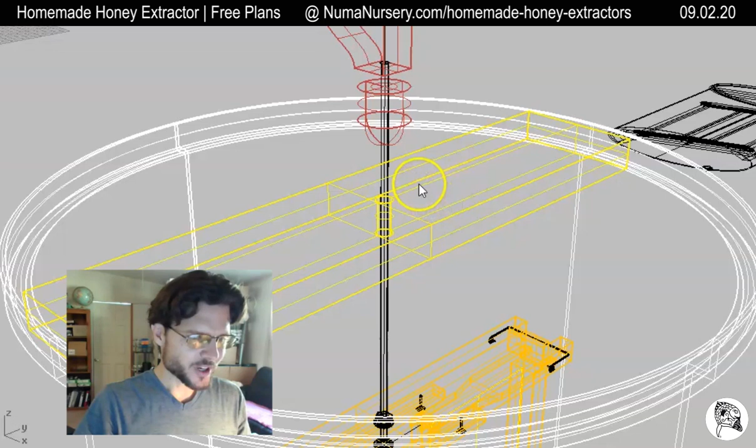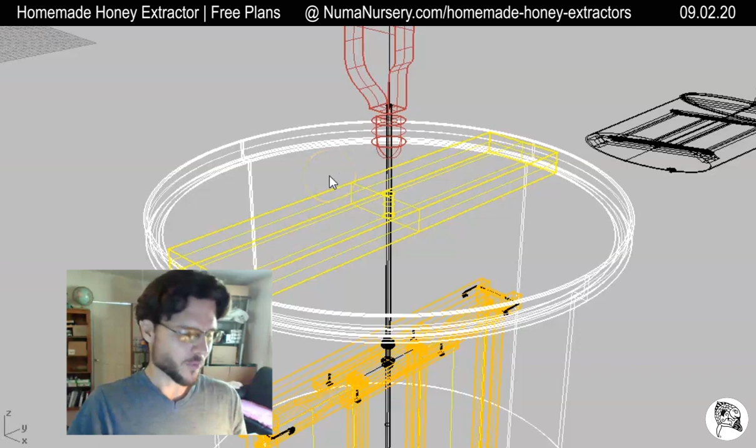In conjunction with this video, we wanted to come out with the free 3D plans for the homemade honey extractor.

So the past couple of days, I've just been putting in the honey extractor plans. I have it right here. This is kind of what's left over of the honey extractor after using it tons of times.

Now a couple years later, here it is. Still, you can see the bottom piece brace, the top brace, and how these metal wires right here actually hold the frames in place at the bottom. And so that way when it spins on a drill with this thread, which is tightened on the bottom brace and the top brace with hexagon nuts, they can spin and extract the honey from the frames.

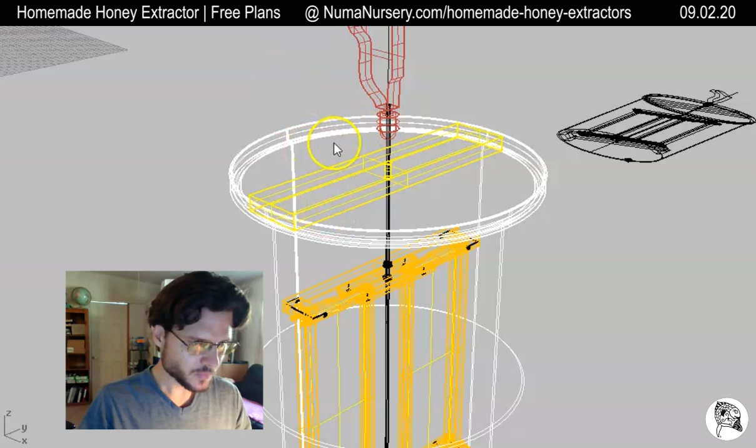Okay, so we have a 3D model here. We can change it—I'm just getting back into Rhino, it's been a few years—but we can change this into a ghosted view. Just take a second. There we go. That way you can see exactly what we're working with here.

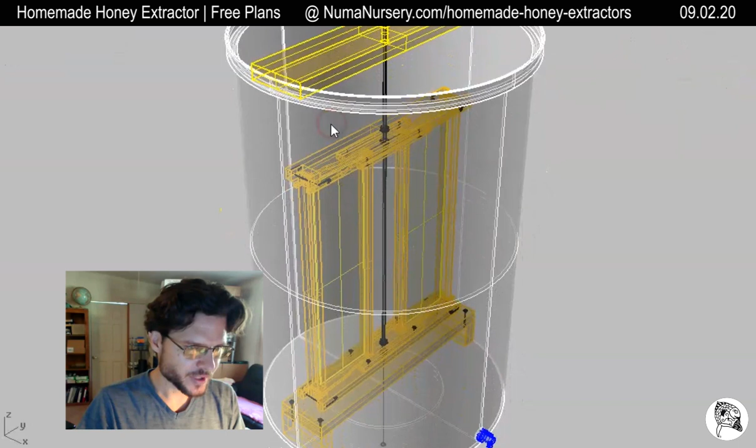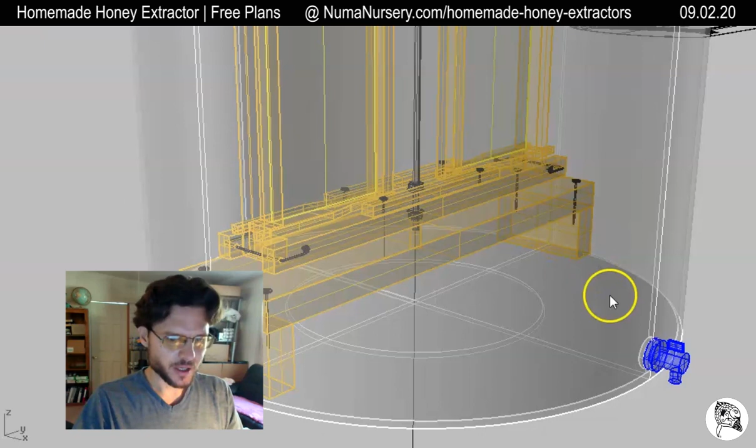We went ahead and put this model in Rhino. It's a 3D model of the extractor. You can see the drill at the top. It's got a sway bar, and it has a little platform at the bottom here that the homemade honey extractor actually sits on.

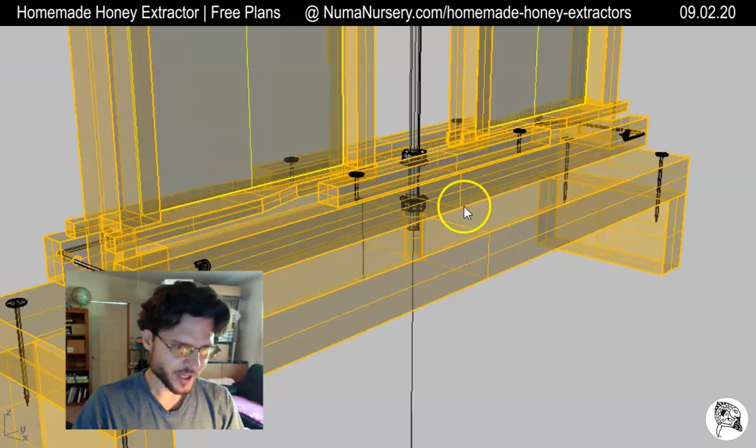There's a hole here, and I can turn off some of these layers. Let's see if I can turn off wood barrel. Let's see if I can turn off barrel. I'm wondering if this is the right one. Yep, so we're creating layers here, and I can select this nut, hopefully.

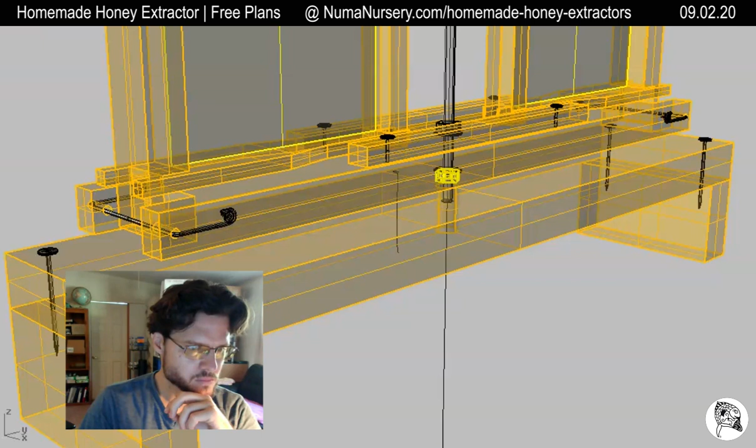Oh, there it is. All right, and so we'll select that nut there. And let's see if we can rotate around that. Just takes a second. There we are.

Wonderful. So we have a washer, and we have a nut, and there's a hole in the platform that this will just kind of sit and rest in as it's spinning.

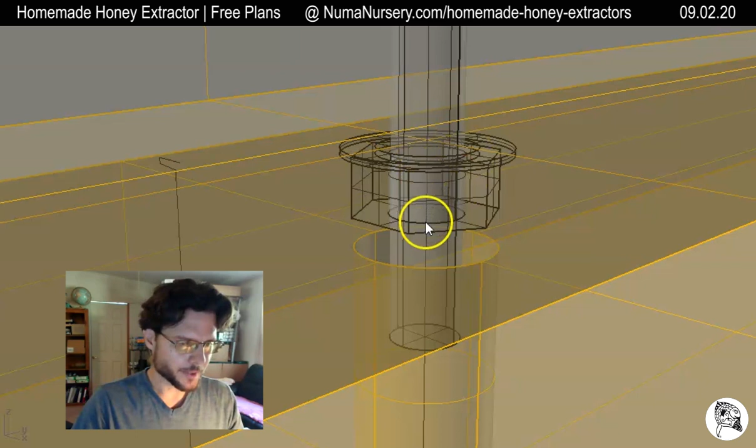I mean, you could probably put another washer here, or sometimes a bigger screw, as it sits on top and spins. Kind of have to experiment, maybe make this hole a little bit bigger so that this whole thing can slide down into the hole.

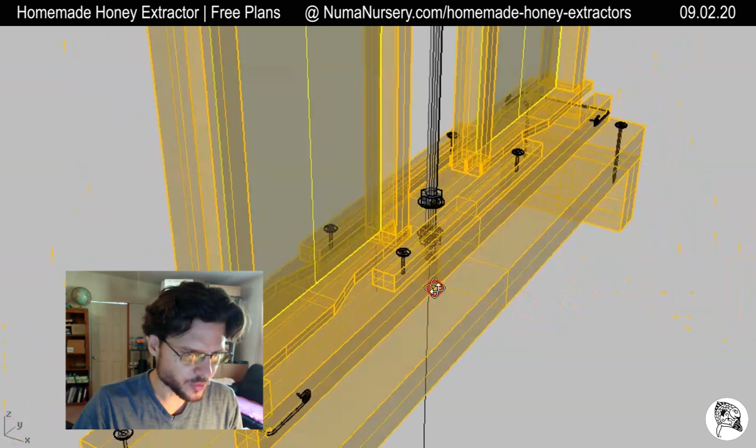It's just a prototype of a homemade honey extractor. I'm trying to keep it quick. We've got a piece of wood and some nuts that hold it in place. There are two braces here, two brackets on the side, little pieces of wood with two screws on each end that hold the frame in place.

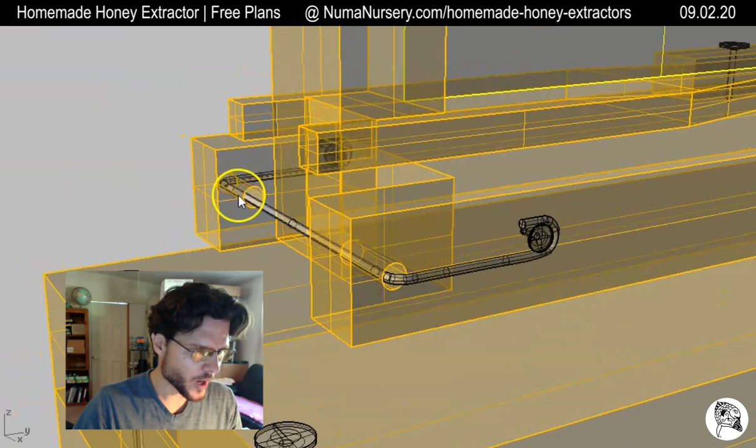And then what keeps the frame from actually falling out of the ends is a metal wire. This metal wire wraps around—there's a hole, a little cutout—and there's a little metal wire that wraps around here.

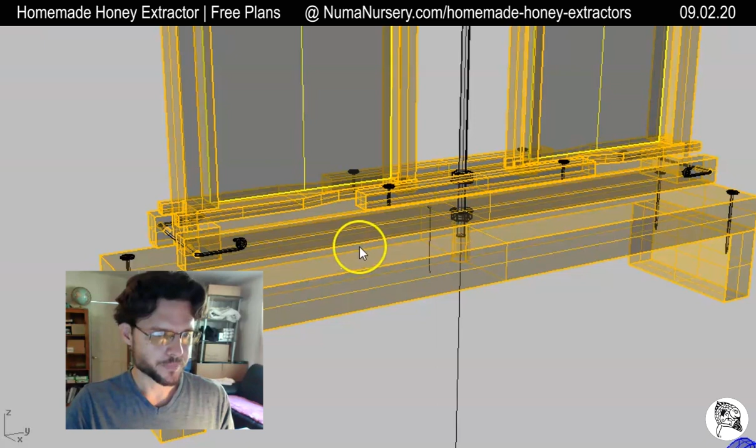And we have an exploded view over here. I'm going to turn the barrel back on. I've just been working on this over the last couple of days, trying to get this out to you guys. Let's see here, we have an exploded view. There we are.

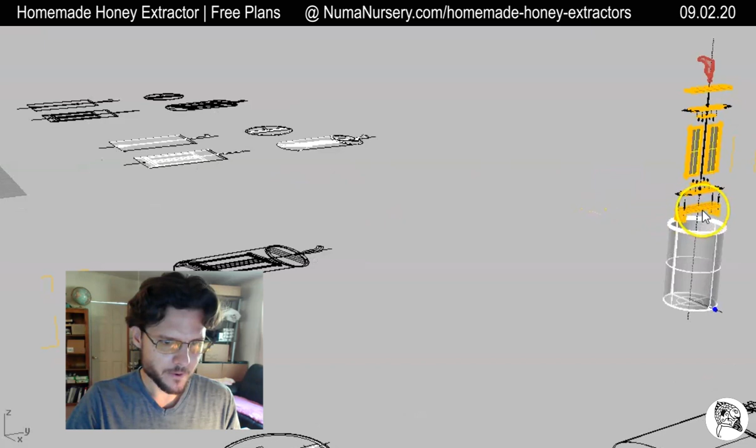So you can kind of see here. I think if I click something here, I can then rotate around that object and it'll kind of realign me. There we go. So we have a little exploded view.

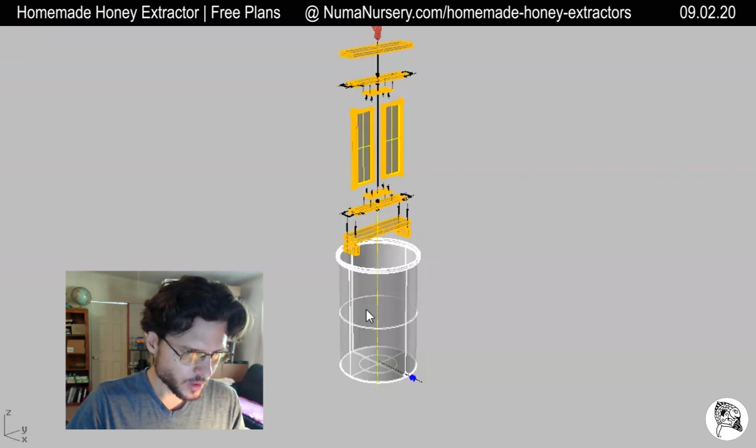Here's the 30-gallon barrel. There's a little drain at the bottom. You've got 2 pieces of wood on the side, 2x4s with a hole in the center. Those 2 screws there hold those pieces together—that's the platform.

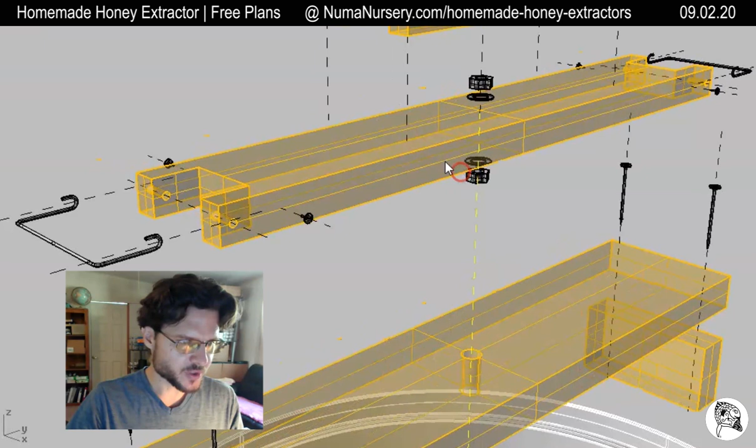Then you have a washer, a nut, a piece of wood with a cutout, and a wire. Those screws hold the wire in place and also allow you to just wrap the wire around that screw and replace that wire if you need to.

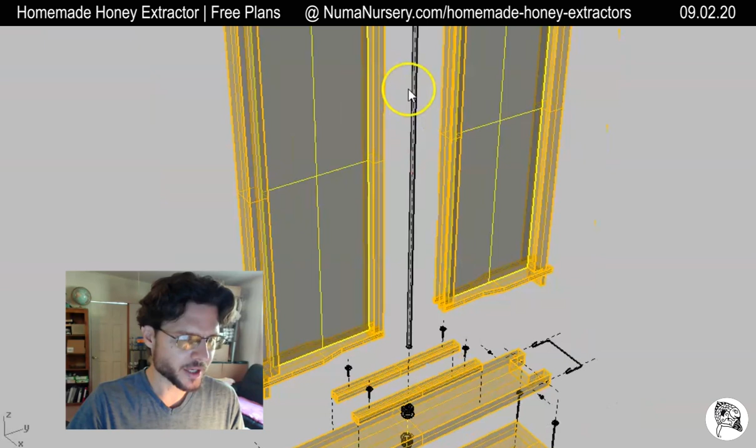There's a piece of wood here that locks the frames in place. This 25-inch long threaded metal rod is what sticks into the drill. And then you have your sway bar up top. You have a top brace, same thing as the bottom brace, and that just holds these 2 standard size honey frames together.

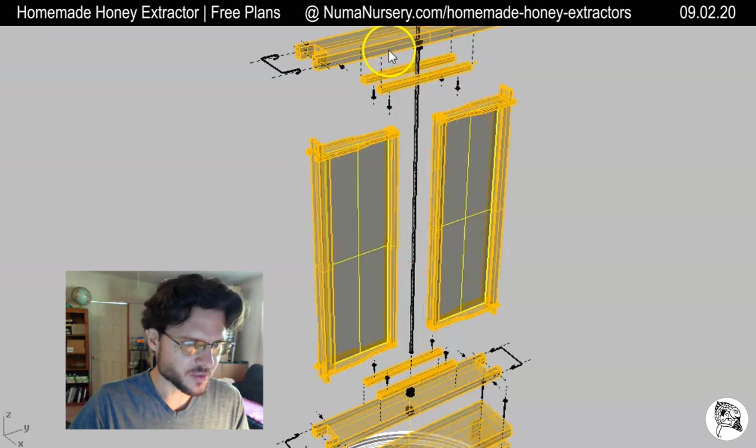And so you can try it, experiment with it. We've had lots of people saying, well, if we just angled these frames, instead of keeping them straight, if we angled these frames slightly, you might get better release of the honey in the frame. That's a good idea.

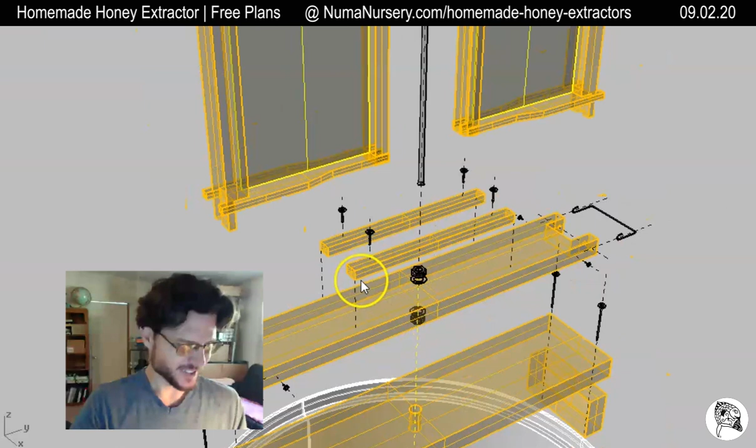So just wanted to show you guys real quick, help you with the homemade honey extractor. Please let me know how it comes out for you, how you're making them.

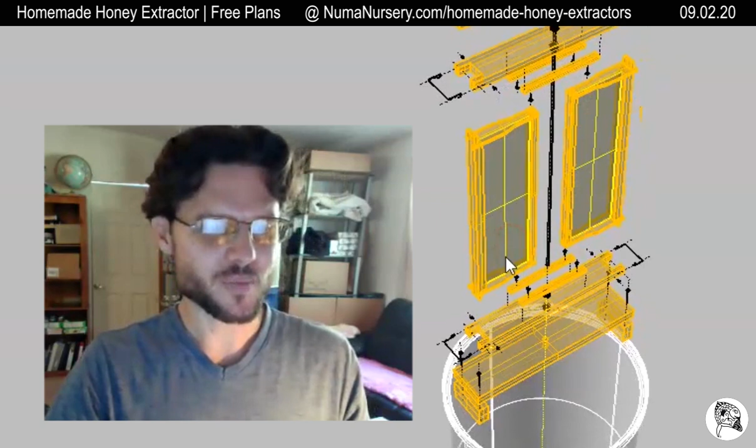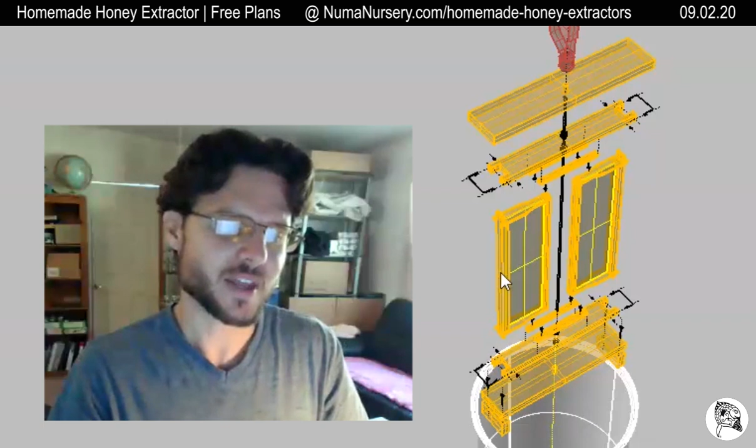I'm just having fun, getting back into designing and things. I'm an architect by trade and have been running a nursery business and starting a co-op over the last couple of years, and now we're excited to actually get the architecture firm launched, Kendrick Henry Studios. We're starting by presenting you plans and giving you do-it-yourself projects for free. Hopefully that'll develop into a typology and a way that I like to create things, which would then eventually lead into how I like to build buildings and houses and places like that, and farms and gardens and using materials. So this is just me getting into my design and architecture career.

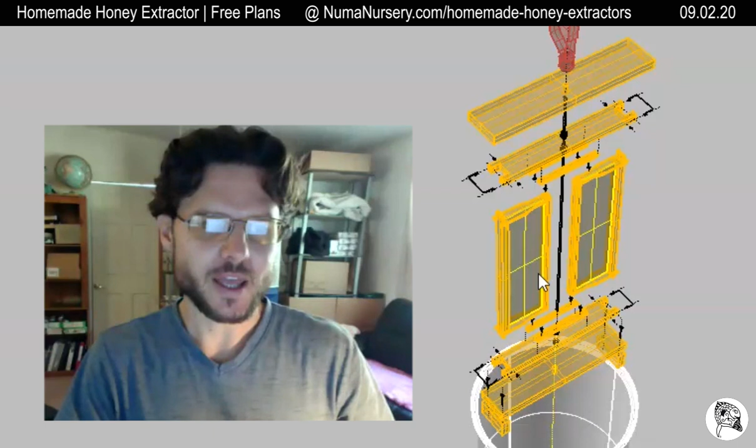And hopefully this will help you in your beekeeping journey in creating a homemade honey extractor from local materials that you may be able to find either already on your property or easily accessible at a local store. So thanks for keeping in touch. Peace, love, and prosperous growing. Cheers.